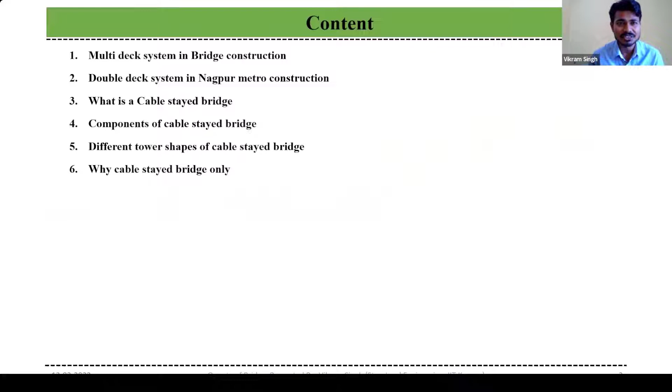So this is the content for now, just 6 slides: what is multi-deck system in bridge construction, what is double deck, what are the double deck bridge components, and why do we need it. That's it, we are not going to discuss a lot today.

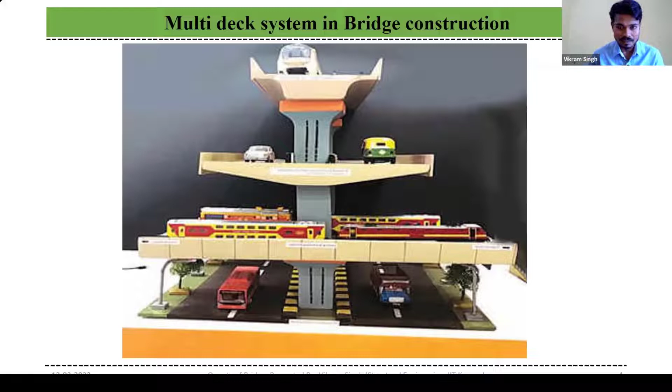But you would be happy to know that there is a double deck system, or ground plus 2 deck system, in the Nagpur metro. This Nagpur metro, I think, is still under construction only. It is like a normal metro system, which is 1 deck ground plus 1 deck only. But here what we have is ground plus 2 deck: on the first deck there will be vehicle movement, and on the second deck there will be metro movement. I have not shown the real figure of vehicle and metro movement here because that was a hypothetical image. This bridge is still under construction and there is no vehicle movement till now.

But one thing I would like to tell you, in the presentation there is a construction joint here, and a construction joint here. Can someone please tell me what kind of bridge this is? Simply supported, or cantilever, or continuous? Someone please tell me what kind of bridge you think this is. Simply supported, simply supported, okay, just a random guess, I'm not asking for the exact value.

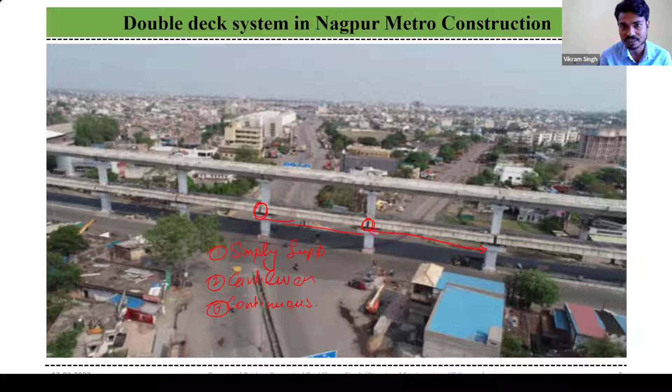What may be the approximate distance between these 2 piers, center to center line? Just an approximate distance, I'm not asking for the exact value.

20 meter approx, maybe 15 meter or maximum 25 meter, not more than that. It will be approx 20 meters only.

It's a simply supported span. The maximum bending moment in a simply supported span is, please don't mind if it is below or above the profile. What I want to show is the maximum bending moment at the mid. If the maximum bending moment is at this mid, then the biggest section you need is at the mid.

One thing I will say here, I'm drawing this same profile at the top. If I draw this as a cantilever only, then what will happen? The maximum bending moment will be here at the supports, and the minimum section will be required at this place. What is the benefit of this?

Constructing the cantilever means, if the maximum bending moment is here, then you need a bigger section here and a small section here. Also, if the section is bigger here, it will again increase the bending moment, or the dead load bending moment. Since we are making the bigger section in case of cantilever at the support and a smaller section at the mid, you are reducing the bending moment itself.

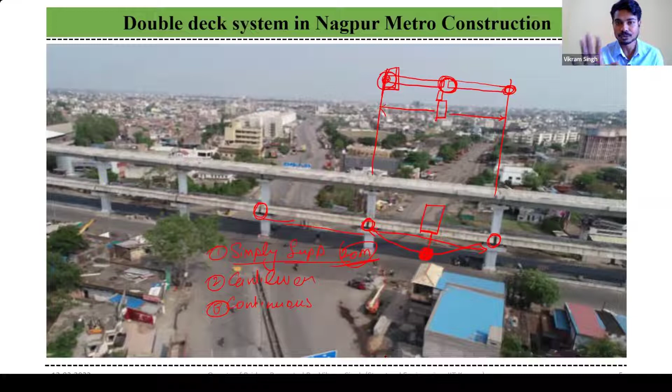But if you are reducing the bending moment, you can save the economy, you can save your money. That's one of the benefits of constructing cantilevers. That is the only meaning of showing this presentation here, this photo here. That's why I did not use a hypothetical image of running the metro and vehicles there. I wanted to figure out that in India, we have ground plus first story of vehicle movement like auto, truck, rickshaw, and now second floor there will be metro movement.

So let's discuss a few things about this cable-stayed bridge. In a cable-stayed bridge, the pylons connect to the deck with the help of anchoring cable.

I would like to state one terminology here. This upper part is called the upper pylon. This lower column is called the lower pylon. In the industry we call it the pylon. I'm sorry, I am not a drawing professional, so please don't mind my writing and text. And this is my deck.

In a cable-stayed bridge, the pylons connect to the deck with the help of anchoring cable, and the guaranteed ultimate tensile strength of these cables is 1860 MPa. You understand the strength of this cable? It is 1860 MPa. I would like to tell you that the least general cable we use is 15.2 mm diameter.

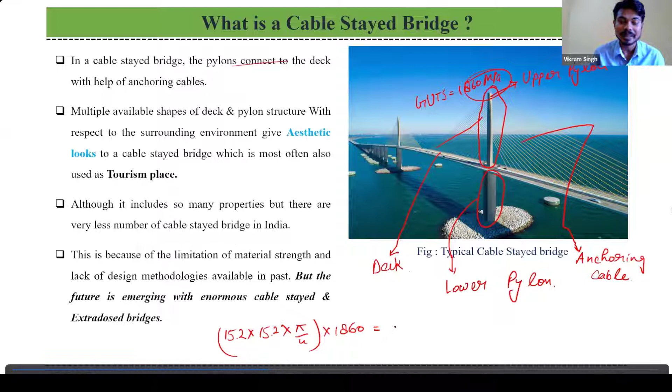So if I find out its area, it is pi/4 into d square, into 1860. Someone can please tell me what is the value here? I teach in the manner of discussion, so please don't sit idle here. Just tell me the value. Anyone? Anyone can tell me, or do I have to calculate it myself?

No, this is the diameter of the cable used in this anchoring cable. So this is d square, this is pi/4 d square, and this is the ultimate strength. So this is millimeter square, and this is Newton per millimeter square. So tell me the value you are obtaining here. 337.51 kilonewton, right? And if I change it to tons, this is 33.7 ton, right?

Do you understand the strength of this cable? A cable of this much size, or maybe this bigger, can pick up approx 34 tons of weight. This kind of cable is used in the anchoring cables. So don't underestimate the power of a high strength cable.

Multiple available shapes of deck and pylon structure with respect to the surrounding environment give an aesthetic look to the cable-stayed bridge, which is most often also used as a tourism place. You would have heard about this tourism place, which is on the Narmada River, inaugurated by our Prime Minister Narendra Modi, and it is built now.

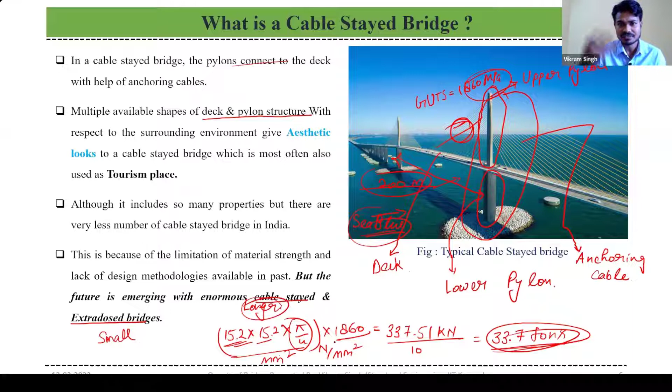So in sketch, if I show you, this is my cable-stayed bridge, this is a typical sketch, and there is a pylon - this is called the upper pylon or tower. This is the lower pylon or column.

This is my cable stays - these cables are called cable stays. At the end there is cable anchorage, and this is my deck. Entirely it is called the substructure as supporting system.

So these cables are under tension as represented here, and the deck is under compression. I will tell you one more fact about this in the next slide.

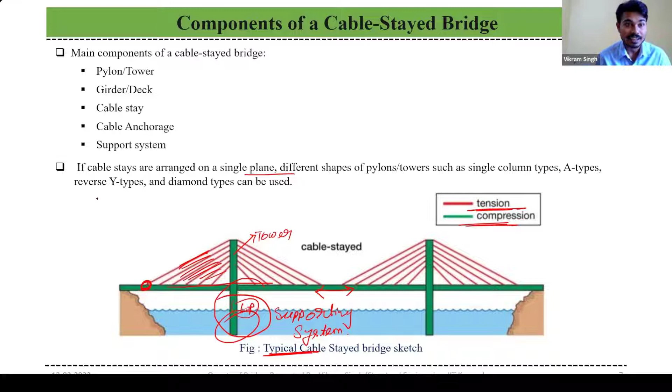So, the different shapes of cable-stayed bridges. You may say that this kind of shapes can also be made in small bridges. Just tell me, if you are constructing a pier for a smaller height, where would you introduce your shapes there? It's already a small bridge.

These long span bridges, as you've seen, or in this presentation, most of them are constructed as water-carrying structures. If you have the ground, like in cities where we construct metros, those piers are constructed at a distance of 15, 20, 25 meters generally, because you have the land available there.

But if you are constructing a bridge inside a water-carrying channel, you cannot dig out at every place and construct pylon 1, pylon 2, pylon 3. You cannot do this, right? So what you do is construct a pier here, a pier here - not just a small pier, it's a bigger pylon - and then you connect all of them by cantilevers.

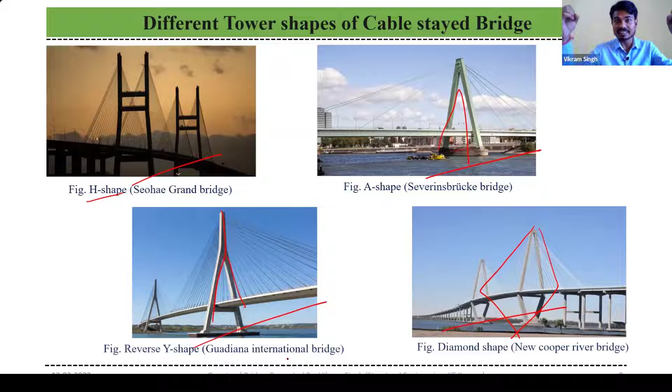Small bridges you can make by simply supporting directly. But long span bridges are constructed in the fashion of cantilever from this support, cantilever from this support, and then made into a joint. If you make it a joint, you can see that it is now a continuous structure.

What we do in the construction of long span bridges or cable-stayed bridges is we construct them as cantilevers, connect them at the mid, and make the structure continuous.

All of you know that bending moments in a continuous structure - although may not be exact - moment redistribution takes place. So if you make the envelope, adding algebraically the value of negative bending moment and positive bending moment, the sum should remain the same.

But if you have a continuous structure, the bending moment values will reduce. Although reinforcement requirement may be at the mid somewhere, at the top somewhere, the entire section will reduce. So making such a small section will be economical for all of you.

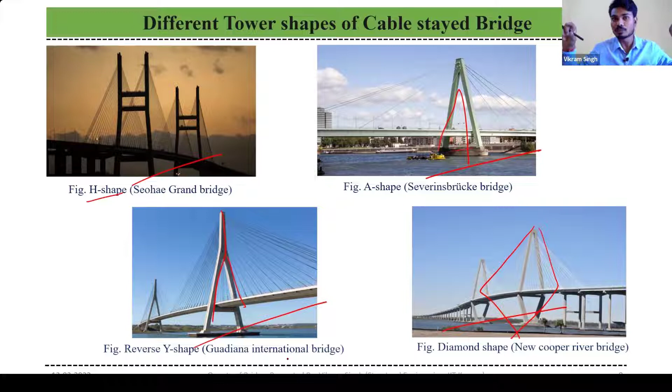So let's come to the main point of today.

Why cable-stayed bridges? We have a lot of kinds of bridges, although I have not shown all of them here, but I will tell you. We have the beam bridge, arch bridge, truss bridge, cable-stayed bridge, extradosed bridge, and suspension bridge. Someone may ask why we are not going for suspension bridge.

We move towards the cable-stayed bridge from beam bridge, arch bridge, truss bridge because of the economy. We cannot construct a pier every 15 meters in a sea or river, so we move towards cable-stayed bridge. The suspension cable is mostly steel, except the tower and deck, and the deck of the suspension bridge is thinner. So a lot of steel is required for its construction, and although the tower distances may be increased, a lot of cost is required. That's why suspension bridges are not most prominent in India.

But then why are we studying cable-stayed bridges, that is a question. If you know about the economy of India compared to developed countries, India is lagging behind approximately 15 to 30 years. So what is already constructed there is now approximately starting in terms of construction here. Please don't go in terms of ISRO - ISRO is doing a great job, moving even forward compared to China and America. But in terms of construction, India is lagging behind approximately 20 years. So what they have already done is now started in India.

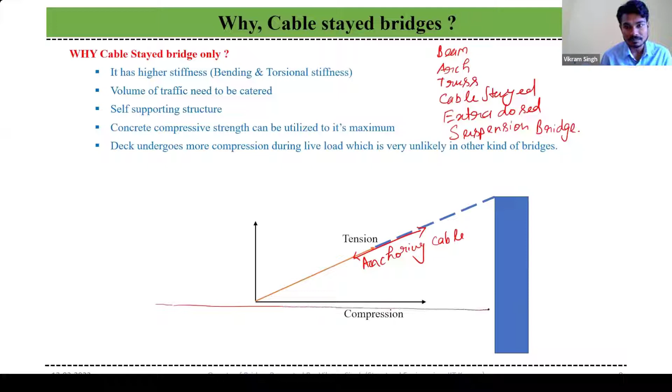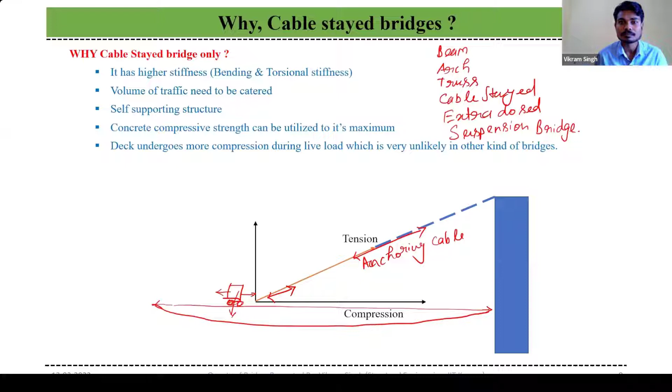A vehicle is standing here. Can someone tell me - it is either moving this direction, doesn't matter. But suppose when it is at this place, this deck will bend downward. Can someone tell me what kind of force will appear in this cable? Anyone? Will this cable undergo tension or compression?

Tension force, okay. So I'm drawing a free-body diagram at this place. Just see this thing, this is my tension. And now this is my deck, and this is a pole.

If this is under tension, meaning suppose this is my anchor and I'm pulling this cable through the hand at this side, just tell me what kind of force will be there in the deck. What kind of force will be there in this deck if I'm pulling the upper cable, or anchoring cable, in the inclined manner? Is it tension or compression? Tension, sir? If I'm pulling this thing from here, so what kind of force will be introduced in this deck?

Tension. In the deck section, top is compression and bottom is tension. No - bottom tension and top compression is caused because, suppose I'm drawing on the right side, if this is supported and you have a load here, then obviously the top goes under compression and the bottom goes under tension. But I'm not talking about the deck now, I'm just talking about if this is a linear element - you don't know whether it's steel, concrete, or anything.

If I'm pulling this cable here, see, this is my compression. Okay, compression. Now see the thing - when the live load is here, the cable undergoes tension. Because of this tension, the deck undergoes compression. And this deck is made up of concrete, and we all know that concrete is strong in compression, not in tension. So what happens when your live load comes on the deck? My deck is undergoing more and more compression only, and concrete is strong in compression. That's why we are utilizing the strength of the concrete itself more.

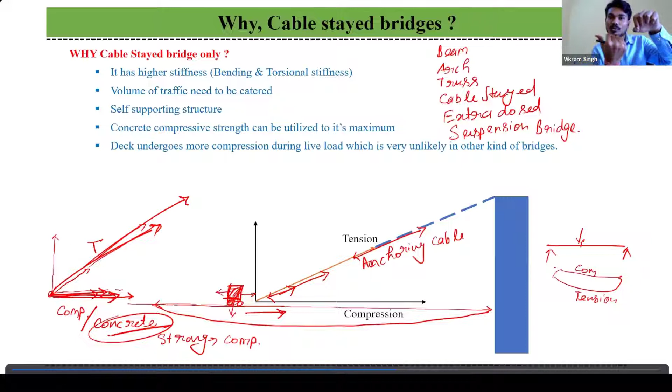The deck is not going under tension now, it is going under compression only, and it is going under compression at the time when live load is there. Suppose it is under compression of 10 MPa when there is no vehicle, that's dead load at the anchoring cable. But as soon as there is a vehicle, there is tension in the cable, and the deck undergoes more compression. The compression in the deck, which was 10 MPa earlier, now increases to about 15 MPa. You are utilizing the strength of the concrete itself. This cable is giving us the utilization of the concrete - that is about the anchoring cable.

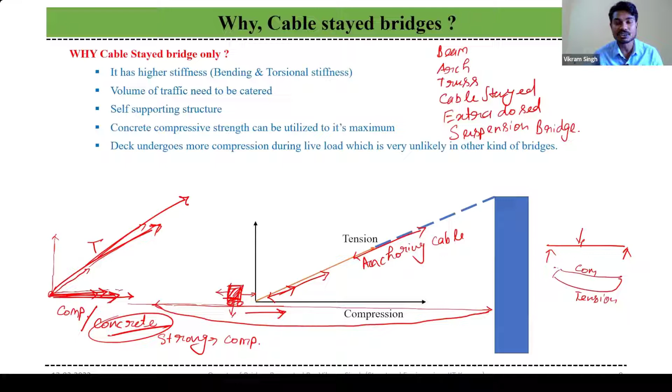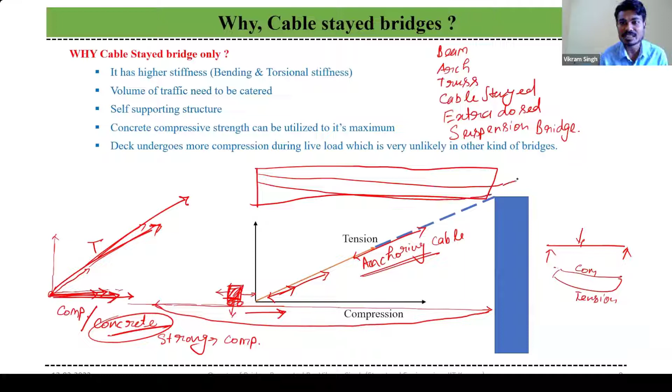Now suppose this is my deck and you have introduced some pre-stress. What does pre-stress do? It utilizes the strength of concrete in compression by not allowing tension in the concrete. The anchoring cable is doing the same thing. But why are we not doing more pre-stressing instead of applying the anchoring cable? The problem is this pre-stress cable will have an eccentricity for moment equal to the depth of the section. But if you need more eccentricity for carrying the forces, you apply the external cable, which goes up to the pylon and then back to the next deck.

So what happens when the vehicle - suppose this is my support, this column - one vehicle is here, it deflects down. The deck will deflect downward, the cable force will transmit to the pylon, which will also deform to this side, although not that much. But as soon as it deflects to the left, all the cables on the right side will again undergo tension only. What is happening? The concrete on the other deck is undergoing compression again. So the strength of the structure is increasing more and more as the vehicle moves on the deck. That is the main advantage of constructing this kind of cable stayed bridge.

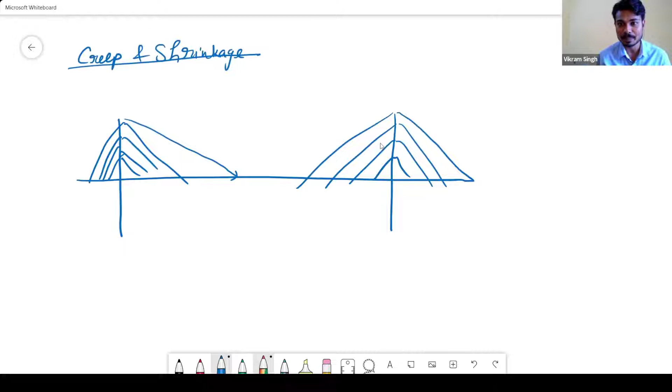So your first question is what about the creep and shrinkage? Cable stayed bridges are generally constructed when the span is more than 200 or 250 meters.

So if it is such a long span bridge, what we do is keep a gap at the expansion joint in terms of meters, not millimeters. So if there is shrinkage, this bridge will shrink or expand on this side - expansion or contraction. You anticipate how much creep and shrinkage may occur in the construction of this bridge, and accordingly you keep your expansion and contraction joint in the bridge.

If you remember, I discussed this before. This is my cantilever bridge, so obviously there is a gap and we connect both of them, but we do not connect them directly. This is my deck on the left, this is my deck on the right. I will keep a hinge beam here, connected through rollers, so whatever creep and shrinkage occurs is accommodated through this joint.

You understand? So if there is creep or shrinkage - shrinkage is obviously contracting the structure and creep is increasing the structure - all of these factors are already anticipated during the designing, how much creep and shrinkage may affect it. Accordingly, your hinge beam segment, which lies in terms of 2 or 3 meters, will be designed. So this is about your first question, creep and shrinkage.

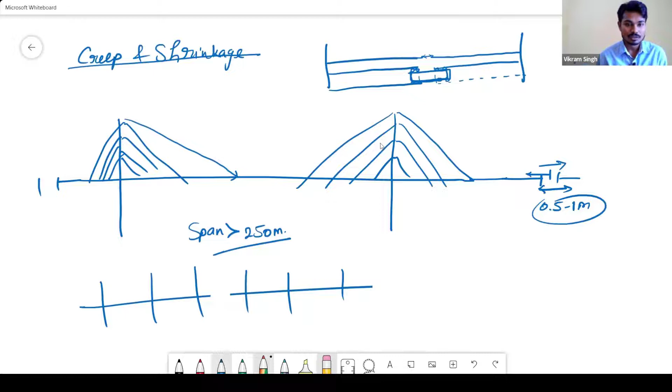Suppose this is my 3 pylon system here. So what will happen after constructing these 3 pylons? Although there is a gap for the hinge beam, I will leave approximately 1 meter here to accommodate the kind of expansion or contraction that cannot be accommodated between the 2 or 3 pylons.

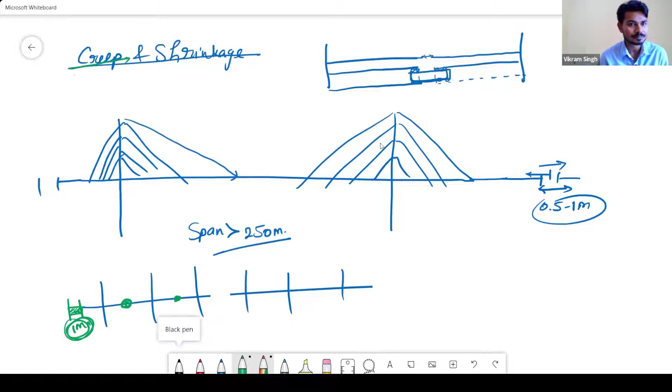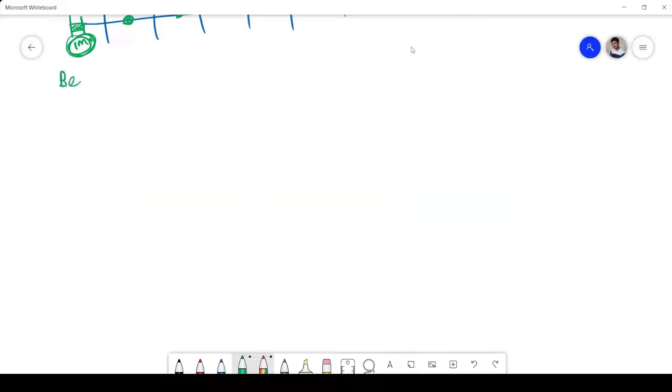Sir, and my next question was regarding the cost, like how cost effective it is, because as you said it's a high tensile cable and all this. So what is the cost difference between a normal truss or normal steel type of bridge or any other structure or suspension bridge compared to this cable stayed bridge? Like how economical is it cost wise? Is there any cost difference, say for example 20% or 30% compared to other bridges?

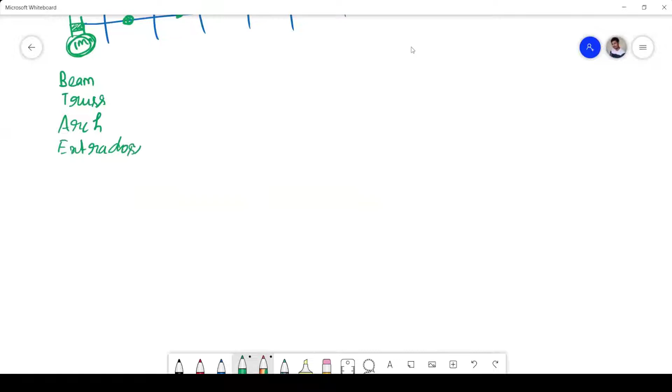So this is the type or the name of the bridges I have already written in the slide. I'm writing them again, just understand one thing. If I'm taking, suppose bridge length is 5 km, for example, I don't mind for this.

What I'm trying to explain is, if your span is suppose 15, 20 or 25 meters, then you will construct your beam bridge. You will not go for any other kind of bridge. Like in metro, what happens - we construct simply supported bridges, although they are pre-stressed box girders, but they are simply supported. In the truss, we go for higher distance, it lies in the range of 40-50 meters. Arch also lies in the same range.

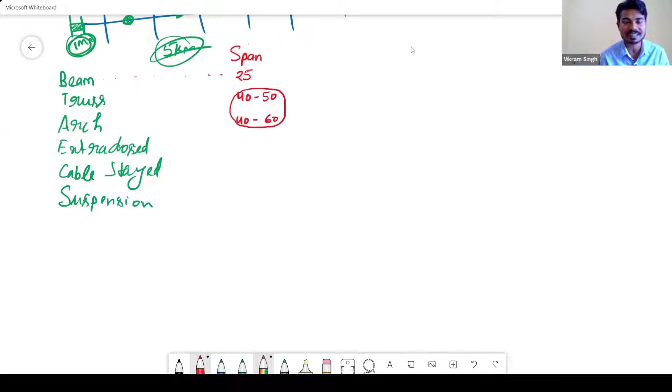So when you have to construct a span in this range, we go for designing both and check which one is causing the economy. Although there may be some difference you read in the textbook, but in general, when you have to construct this 40-50 meter span, you design both and see which one causes economy. Extradosed bridges are constructed when there is a span of 80 to approximately 180-200 meters.

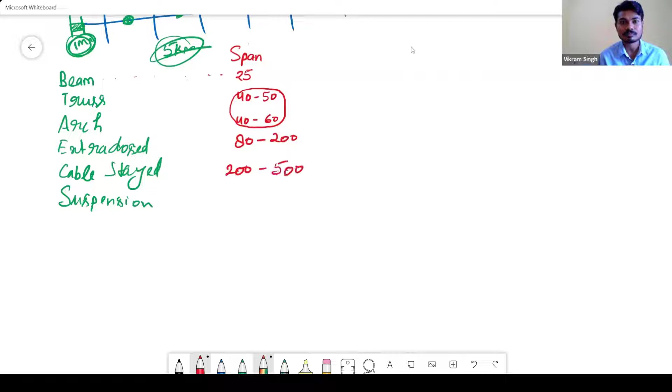Cable stayed bridges are constructed when there is... and suspension bridges are constructed when there is, I'm writing in terms of this. So it is not about the cost or economy how you manipulate it - it's about how much distance you can construct your piers. If your main span can be constructed for this much length, you will construct a beam bridge. You will not go for cable stayed bridge because cable stayed bridge needs a lot of reinforcement, pre-stress and anchoring cable - the cost of this cable is very huge.

But just let me give one example here.

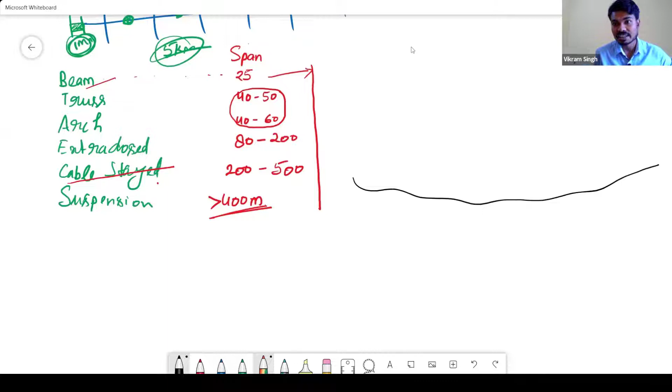This is my water carrying channel, its width is 10 kilometers, suppose 10 kilometers. Now, if I construct a beam bridge, then tell me how many piers you have to construct?

But if you construct a cable stayed bridge, I am taking 400 meters as approx. So this 10,000 by 400 will give me, can someone tell me the value? Okay, 25. So instead of 400 piers, you can dig out only 25 piers and complete your bridge.

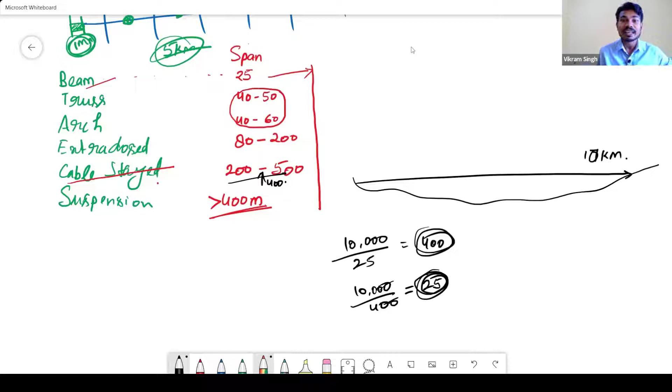Do you understand how we are determining which kind of bridge we are going to construct? This is based on the topography, economy, all of these factors. Since you cannot construct a beam bridge or truss bridge or arch bridge here, because it is flowing water, a canal, this water will not stop here. They will not allow you to construct any kind of bridge here.

You construct a beam bridge? No, water is flowing 24/7, 365 days. It is not going to stop for you so that you construct a bridge here. In that case, you have to decide that you go for a suspension bridge or cable bridge or maybe extradosed bridge, but you cannot go for a beam bridge, truss bridge, or arch bridge. So you have to spend a lot.

You have to spend so that you can construct a bridge. It is not dependent on the cost itself, it is dependent on the geography where you are going to construct. I hope this answered your question.

If yes... sir, thank you so much for elaborating with such a great example. Really, now it's clear to me because I have seen a few Chinese bridges which were made with RCC for a long span also, having intermediate piers in between. I think this is the first kind that was made in Japan. So that's why this question came to my mind. I hope you might have seen that bridge, the one I'm talking about.

Yeah, I understand, I have studied a lot of them, so that also I have studied. Lastly, I would not disturb much, sir.

Say for example, after a few years some cables get damaged, so do we consider that margin in our design? I mean, say for example 20% of the cable goes wrong. So what we do, the ultimate strength of cable is 1860 MPa.

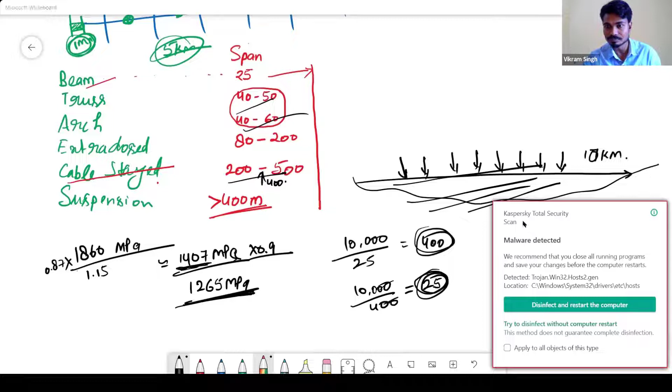So what will happen, I'm sorry, what will happen if I design this cable only for this much and I apply 10 cables? Even if one cable fractures, the other cables will reach the design strength, not the ultimate. So it will not fracture itself. Yes, we counteract, or we already anticipate that one cable may fracture at some instant of time, so we counteract or anticipate that already in the design.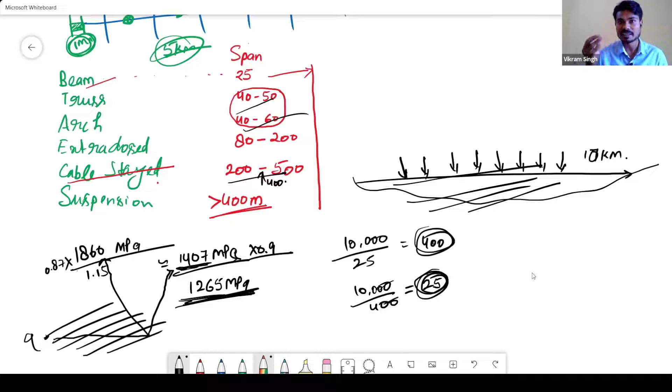Thank you, sir. Thank you so much. Thank you.

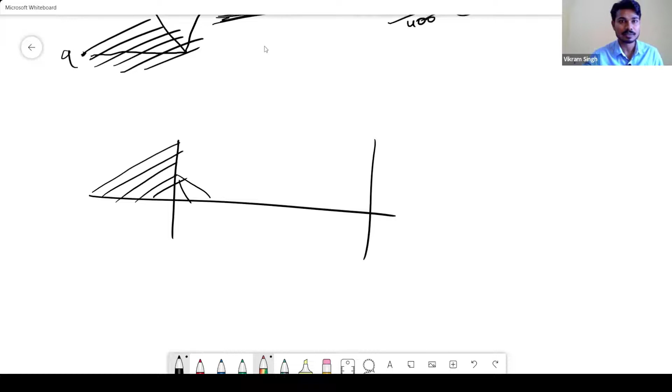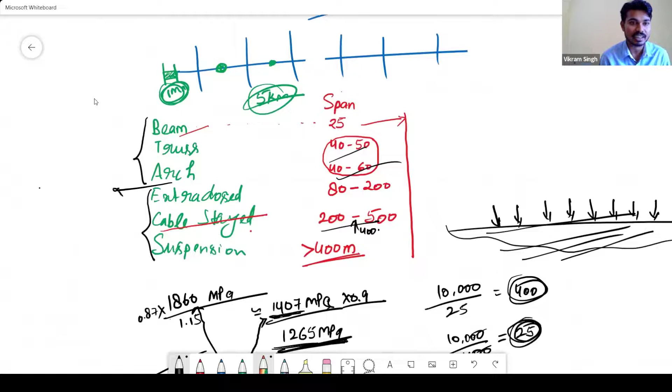What happens, as I told you, okay, I had forgotten to write one more bridge. In between this, after these three and before constructing these three, there is one more bridge that is called the cantilever bridge, the cantilever pre-stress bridge.

We construct this extradosed, cable stayed, or suspension bridge only and only if your pre-stress concrete is unable to carry the loads. And applying the upper inclined cable does not mean that you have to exclude pre-stress. Pre-stress is still there because when the load is there, the deck undergoes compression because of that load component only. But when there is dead load only, there is no cable tension and compression.

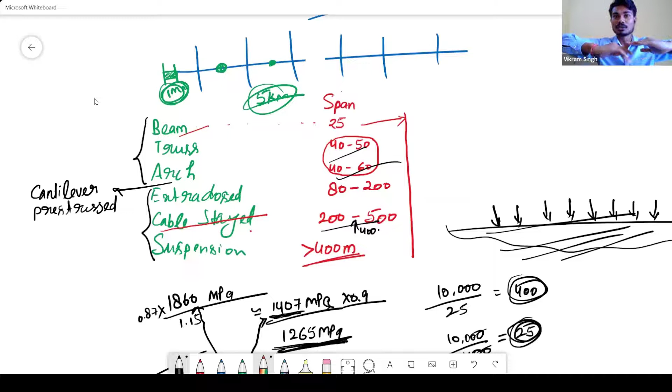At that time, the deck will undergo bottom tension. For that, we have to introduce pre-stress to bring it under compression only. So pre-stress and cable both are present there, even in a cable stayed, extradosed, or suspension bridge also. So it is not like that if you apply your anchoring cable, then you can exclude pre-stress. No, you have to apply that also.

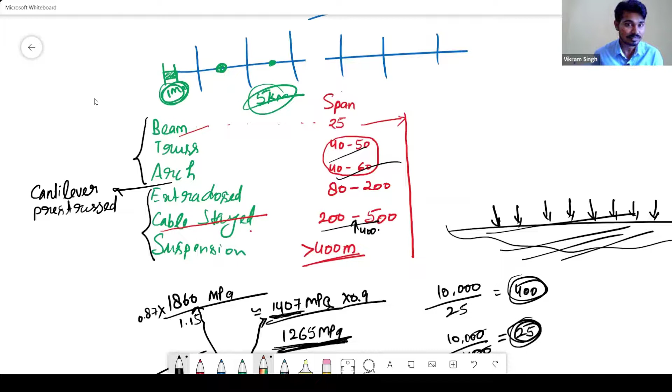Is that answer your question? Yes, sir, thank you. Yes, sir, thank you, sir.

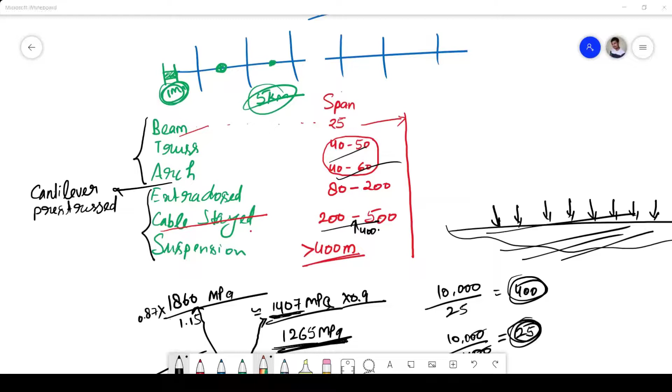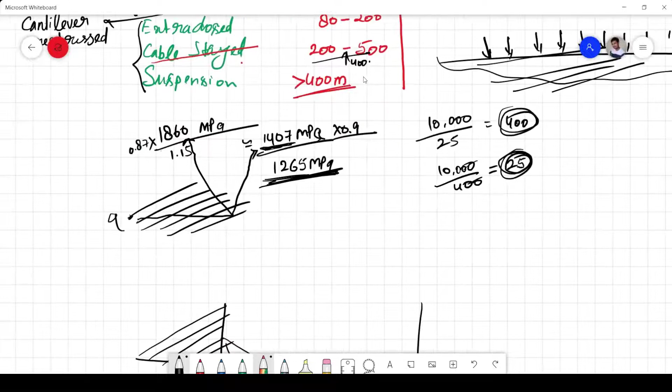Sir, can I ask a few more questions? Regarding this course and what you will be covering in the entire session, can you elaborate on that, sir?

Okay, just give me 1 minute, I will find it out.

Before that, I can tell you one thing: this is just a webinar for, I think, 1 hour or half an hour. But we are also going to conduct a workshop, 1.5 hours per day for 3 days. This will be, I think, next week. So if you wish, you can join that.

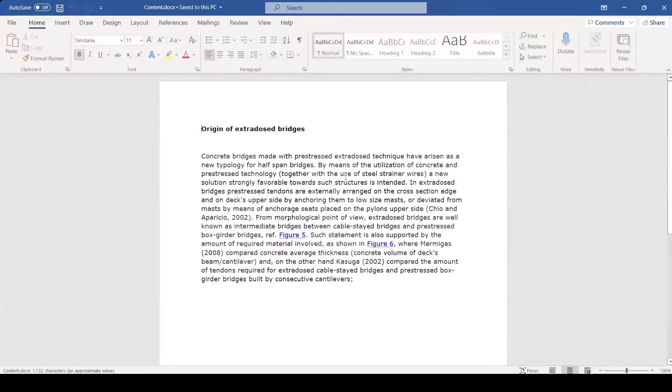Yes, yes, sure sir, thank you so much. Just give me 1 minute, I will tell you the content also. Okay, this is not the content, this is the syllabus.

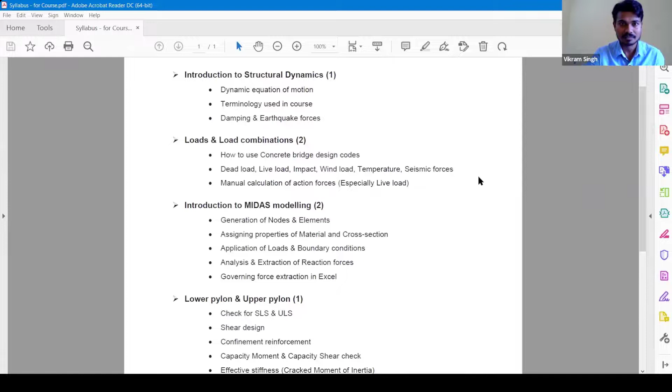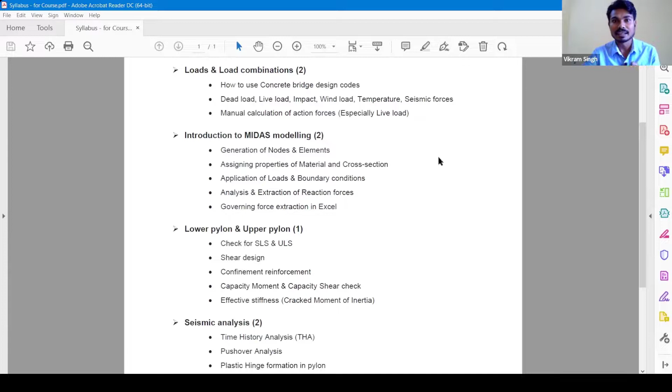So what we are going to discuss in the course: first, in the last session we had a class about introduction to structural dynamics, but this time we will not have this because as much dynamics as we need, I will discuss during the lecture itself. What we discuss in the class is what kinds of loads there are, how we apply them, how we calculate them manually, and how we use them in the software, which is MIDAS, which we are going to discuss in the course.

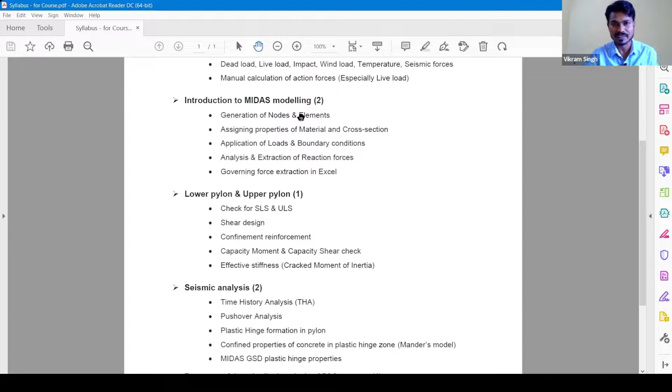Then we are going to discuss the upper pylon and lower pylon design, which will take approximately 1 class. Then we discuss earthquake analysis, like pushover analysis, hinge properties, confinement properties, and how we calculate the deflection.

And how we verify whether our structure can undergo such deflection or not, that is verification. Then we go for deck design. If this is my deck, I'm showing this deck in this format. So we are going to show the design of whether this vehicle, if it is traveling in the longer direction of the bridge, whether this bridge has sufficient strength or not. And if the vehicle is on this edge, whether this bridge will twist or not. We have to design for all of these.

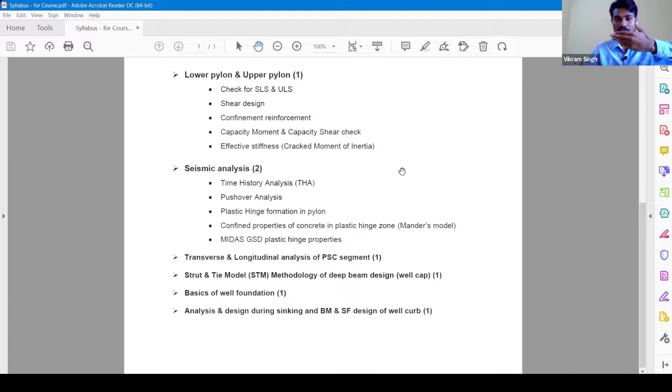And then there are some new concepts, one of which is plastic hinge formation. The second new concept is the strut and tie model, which I don't think anyone knows. I learned this after undergoing 5-6 months of understanding. I have a lot of content for this.

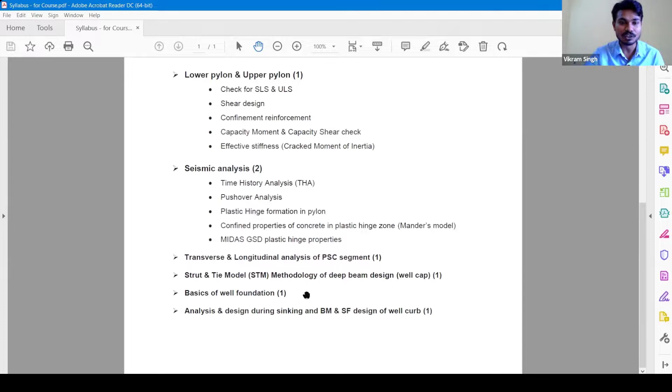Then we are going for basic well foundation design. It is just basic, not a lot, because this foundation design is primarily governed by geotechnical engineering. Although we are going to discuss a few things which are structural engineering, this is about the basic only, because we cannot go too deep into discussing the well, which is geotechnical. But still, we are going to discuss it for more than 2 or 2.5 hours.

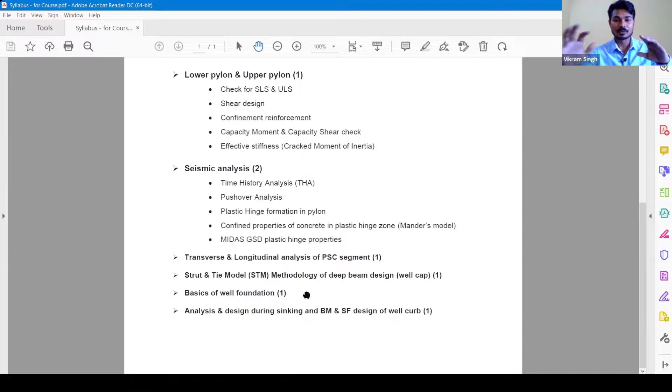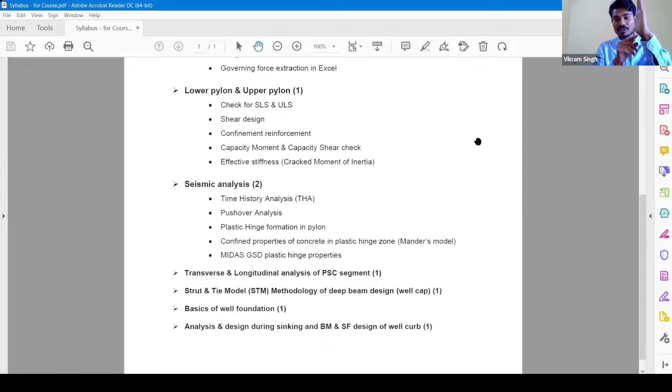Then we are going to discuss, suppose if I can write here... no, I cannot write. So suppose this is my well. At the bottom there is a triangular geometry, and below this triangular geometry, okay, I will show you one thing here, please bear with me. Just a minute.

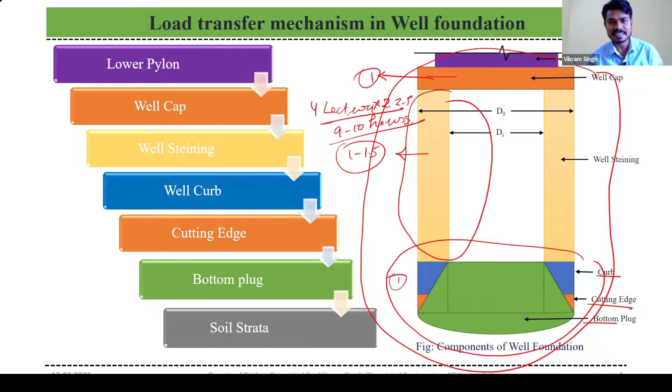So this is as of now, but for the next session I am actually modifying this content, so this course will include approximately 9-10 hours of lectures.

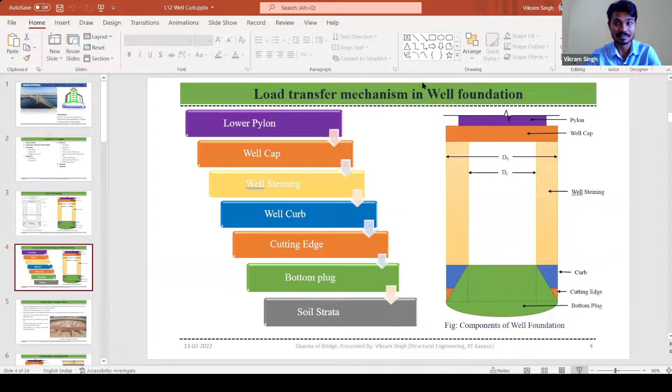I hope I replied, yes sir. Will it be a live demo session like this, or self-paced learning? It is live session only, just like a classroom. If you have any query, the session will be in the same format, and you will be given access to the recorded sessions too. That's great, I was looking for the same, sir, it was very interactive today. Thank you so much, sir.

You can see the content also, I hope you would like it. I had gone through the contents, I was only having doubt whether it's going to be live, but you have elaborated very well, sir. Thank you, I'm looking forward to this course.

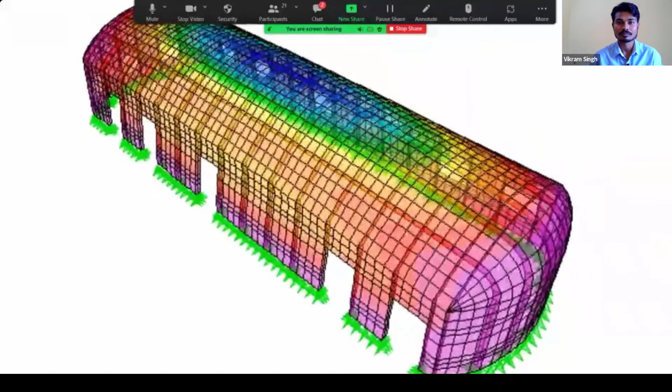For those who don't know me, I ran a ballet company for 15 years and dealt with the public. They know nothing about what we do as structural engineers. When I tell them we create computer models of bridges and buildings in computer memory, shake them with earthquakes, blow wind on them, and the software tells us which portions of the structure are going to break so you can fix it before it's even built, they look at you like, are you some kind of genius? But that's what we do. They don't know that. This is the kind of education we need out there.

The beauty about structural engineering is that you make life better for all of humanity on a daily basis. You're in the business of saving lives. People become heroes by saving one life, but you are saving lives every time the wind blows. They don't know that out there. The Salesforce Tower, the biggest tower in the Western Hemisphere, performance-based design, the only reason that building will stand in San Francisco is because of its amazing engineering.

There's a mention of some artist, the architect is mentioned, but no structural engineer - that's the reason why people don't know. We have so many amazing stories to tell, people are blown away when they find out the things you do. Learn public speaking, get out there and talk to them. Pick it up, make friends, talk about your profession, there's so much they want to hear from you.